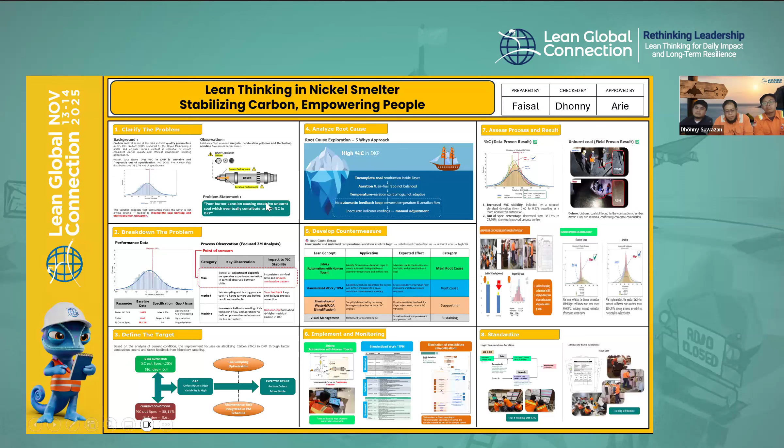Let's begin with the first step, clarifying the problem. In our smelting process, the carbon percent in the dry kiln product, or DKP, is a critical quality indicator. However, our data showed the percent carbon value was highly unstable.

Especially in DOS1 where about 38% of samples were out of specification. During field observation, we noticed inconsistent combustion behavior with signs of incomplete burning, meaning unburned coal was frequently found, and that means cost for us because the coal is not burned. This instability not only affects product quality, but also impacts downstream calcine performance and overall energy efficiency.

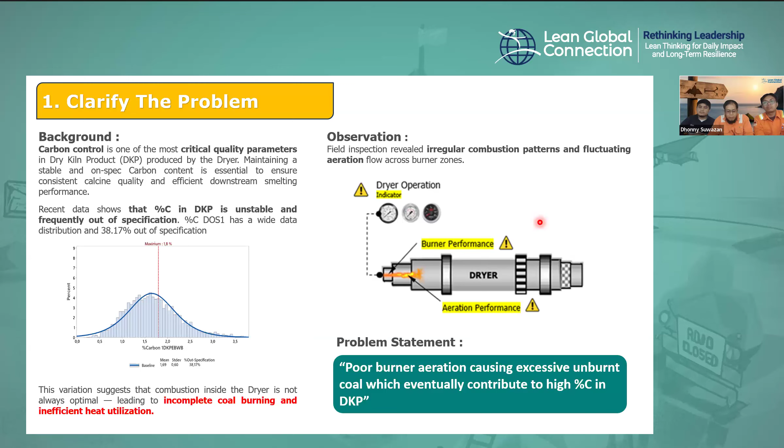Next, process observation. We performed detailed observation focusing on the 3M: man, machine, and method. We found 3 key issues: unstable aeration, non-adaptive temperature, and slow lab feedback for carbon analysis.

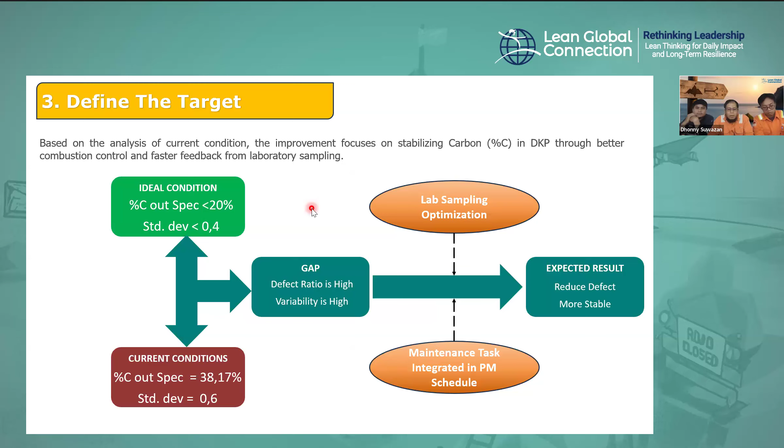So our target was clear: reduce out-of-spec samples from 38% to below 20%, and lower standard deviation from 0.6 to 0.4. The main gap was the unstable combustion process driven by unlinked logic between temperature and aeration, and delayed corrective action due to long lab feedback time.

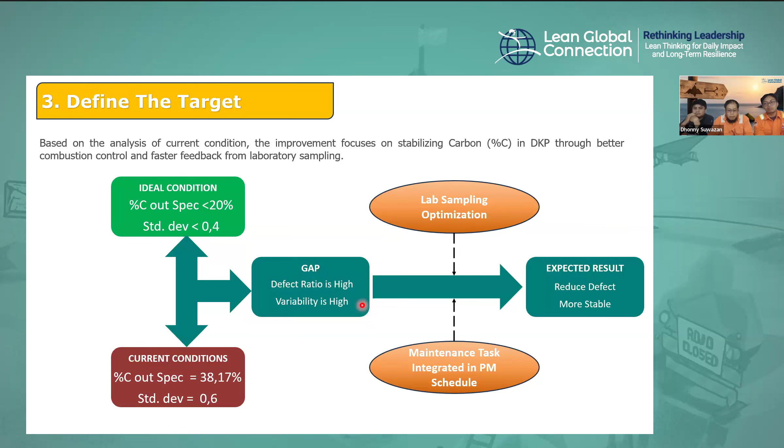Now we are presenting the root cause analysis of the problem. We used the 5-why analysis to trace the root cause. The root cause is that when temperature and airflow weren't balanced, it led to incomplete combustion, leading to high residual carbon. The high residual carbon revealed the need for a smarter control logic that dynamically links these parameters.

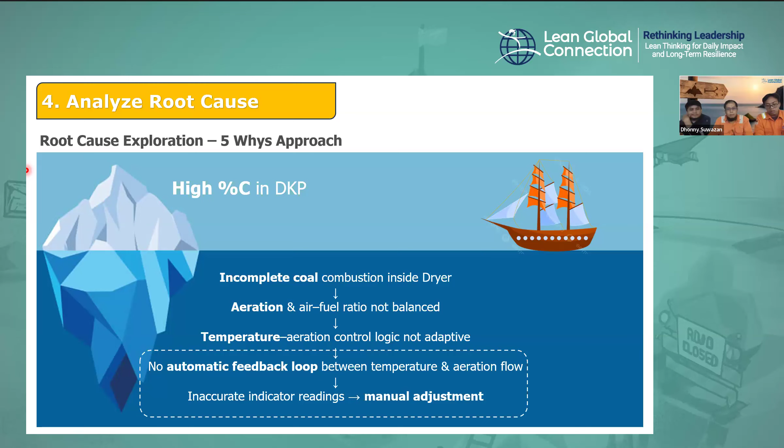Then we developed countermeasures based on four lean concepts to shape our improvement. The first is JIDOKA, which means automation with a human touch; then standardized work and TPM; then simplification to remove waste; and finally visual management for transparency. Now let's see how we implemented these four lean concepts in our project.

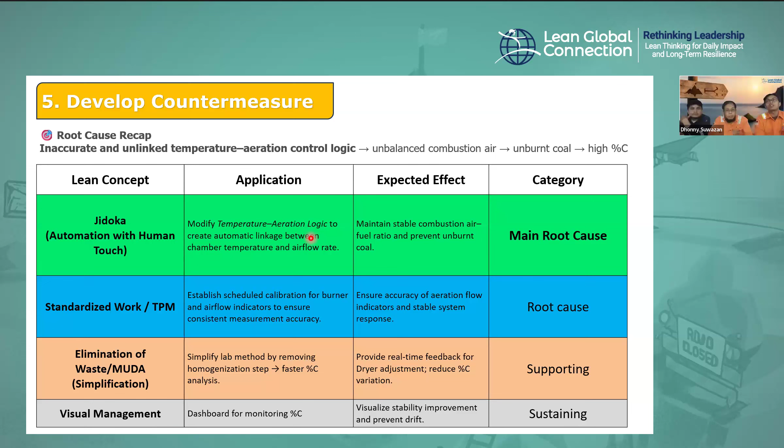The first one, JIDOKA, means automation with a human touch. We enhanced our control logic so the system could automatically adjust the air-to-fuel balance, yet still allow the operator to manually intervene whenever an abnormal condition happens. This ensures both reliability and safety in the operation.

Then, standardized work with total productive maintenance, or TPM: we standardized key operating parameters and integrated preventive maintenance tasks into our total production management system. The final concept is the elimination of waste through MUDA, or simplification.

In the lab carbon analysis problem, we identified that the issue was the long analysis time. We identified unnecessary steps - this one is homogenization - removed them, and improved the workflow. Together, these three activities link technology, people, and process discipline.

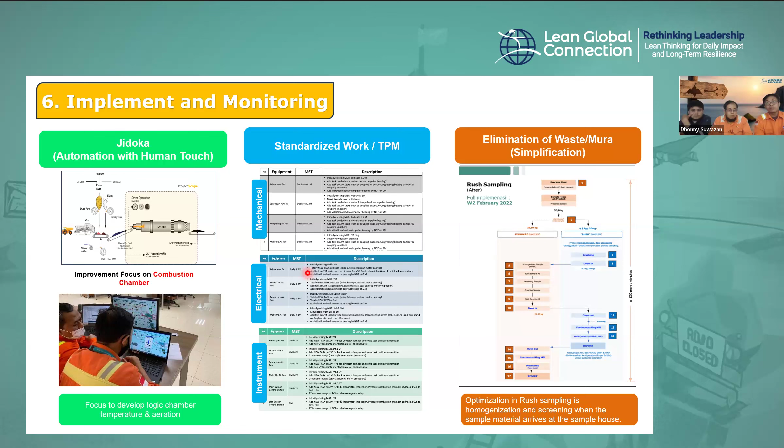Then we simplified the method for carbon analysis. Previously, every sample had to go through homogenization, which took time. After that, we removed the homogenization process and conducted statistical analysis. The result showed no significant difference between homogenization and without homogenization, and the analysis time improved by 38%.

This gave us the chance to create improvement. When the carbon analysis was quick, it gave a quicker response to the operator, and then the operator could manually adjust the flow and air so the carbon became compliant with our standard.

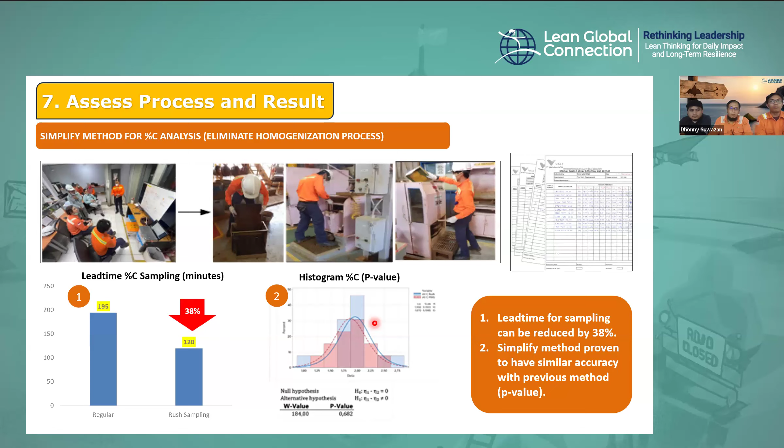Moving to the next slide, we are assessing the process and the result. After stabilizing temperature and aeration, we assessed how much our process improved stability. If you look at the first histogram, with the implementation of automatic logic compared to before, the earlier histogram showed a lower peak, meaning the process wasn't stable.

Various unstable data happened in this one and in this one too. After we conducted the automatic logic, we have higher peaks and more precise results, which means the temperature will be very controllable, and then we move to the aeration.

The second histogram is the aeration. Before implementation, the peak was low and wide, indicating variability in the data. After the improvement, the peak becomes narrower and higher, meaning the aeration becomes more controlled, within 110 to 130%. This shows enhanced air control and more complete coal combustion.

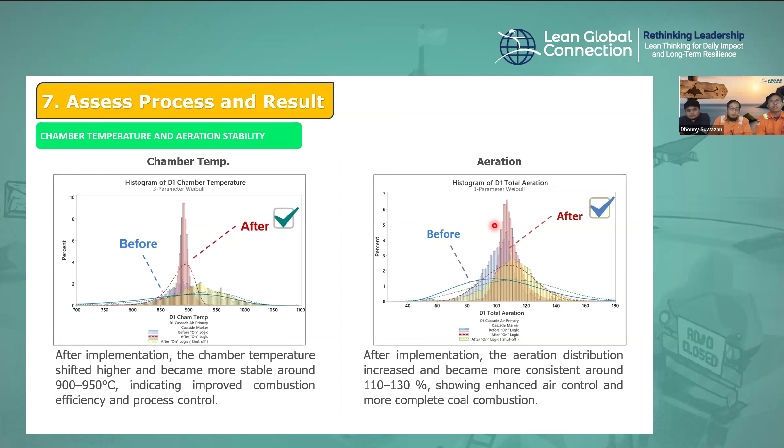After that, we go to the final result. This shows the percent carbon, the parameter that caused instability in our downstream process. This is the carbon before improvement. The blue line shows the carbon having variability from 0.6 until 0.37.

This means our improvement shows a lower standard deviation. This means our process becomes more stable, and the out-of-spec rate becomes lower, from 38% until 22.76%.

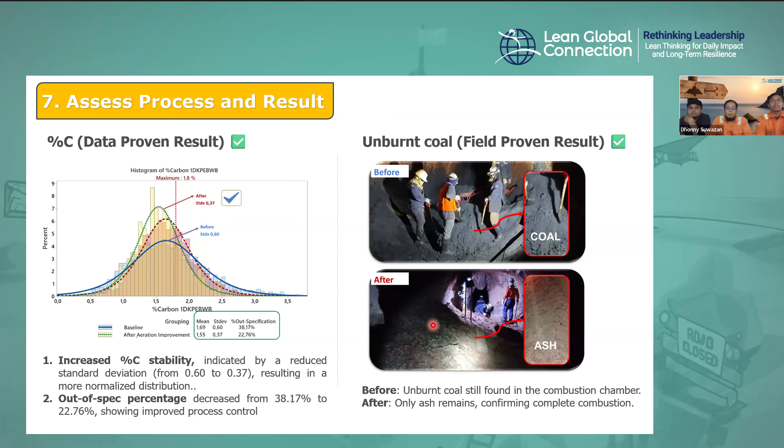Okay, thank you Mr. Ari and Mr. Faisal. Let me continue our presentation. The last step is the standardized process.

Once the process becomes stable, our focus shifted to standardization and capability building. We conducted training sessions for all control room operators to ensure everyone understood the new temperature and aeration logic. The training covered not only how the automatic mode works, but also how to respond when the system detects an abnormal problem. This helped the operators gain full confidence in running the new system.

We also created a new SOP. We developed a formal SOP to officially adopt the new rush sampling method that had proven successful, making it an official standard for future operation.

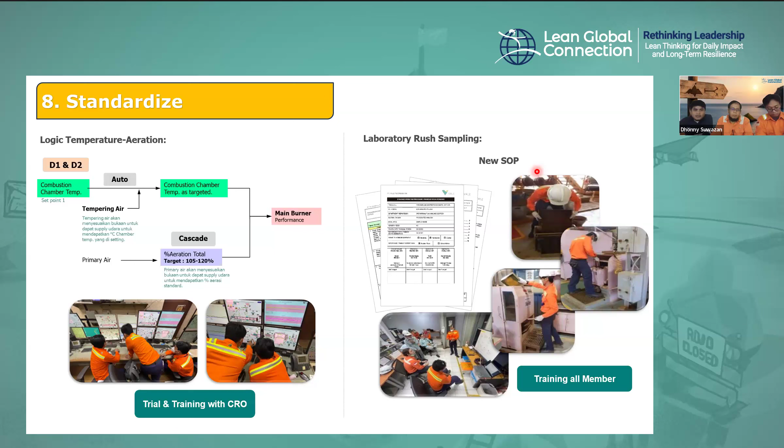As part of the standardization phase, we also established a maintenance schedule to keep equipment reliable over time. The schedule includes regular inspection and cleaning tasks for our combustion system. We also strengthened daily monitoring by adding visual management boards in the control room, like this picture, displaying key parameters such as chamber temperature, aeration, and percentage trends.

To close the project, we also took time to celebrate the success together with the team. This celebration was not just about the result, but also recognizing everyone's contribution. This is a reflection of the Lean principle of respect for people.

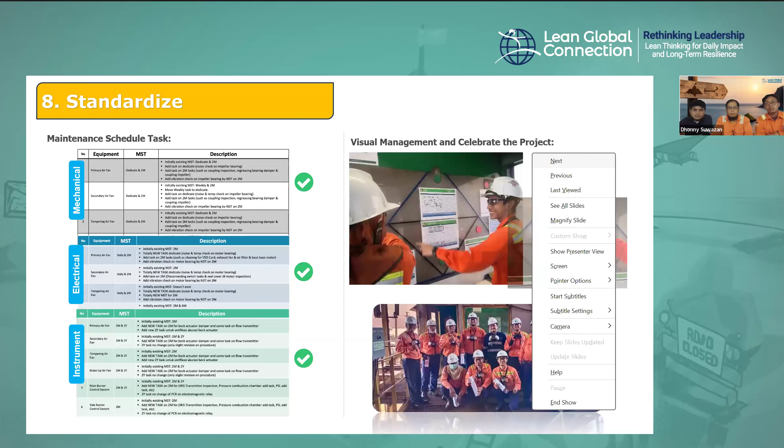To close our presentation, we would like to bring the message back to our title: Stabilizing Carbon, Empowering People. The project proved that Lean thinking truly works when we focus on understanding the problem deeply, improving the process systematically, and engaging people with respect and purpose. Through Lean, we didn't just stabilize carbon performance - we built stronger teamwork, faster learning, and lasting ownership.

Okay, maybe this is from us. Thank you for your attention.

Thank you very much, Ari, Faisal, and Dhonny. Excellent presentation. I think it was very good that you were able to not only solve the technical problem, but also show respect and introduce Jidoka as part of the solution. I'd like to ask the audience, do you have any questions?

If you have questions, please feel free to put them in the Q&A and we'll try to answer them. But maybe if I can, I'll just ask the team: which Lean concept do you believe had the most significant impact on the sustainability of the improvement?